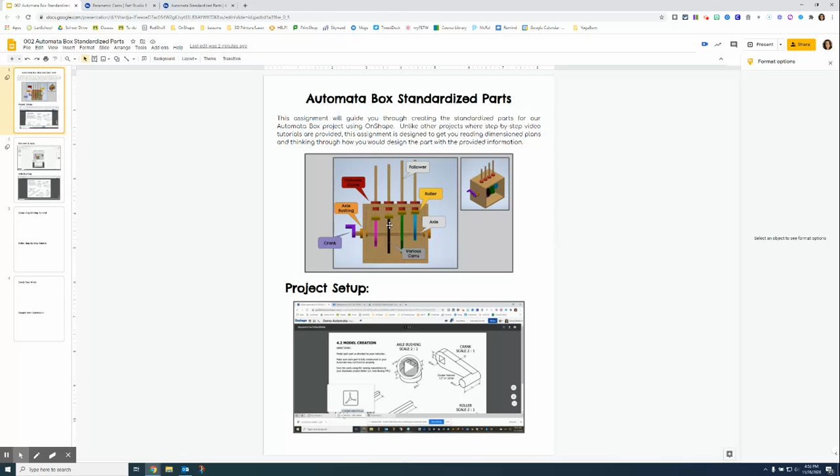What I mean is we are going to sketch this. It almost looks like a semicircle, but it's not, and I know that because I have this linear dimension here, 0.0625, and a radial arc measurement. We have a linear measurement here provided by the 0.625 typical marking. So what we're going to do is sketch this semicircle with the little straight nubbin, extrude it back, and then we have a square that we will extrude a certain depth.

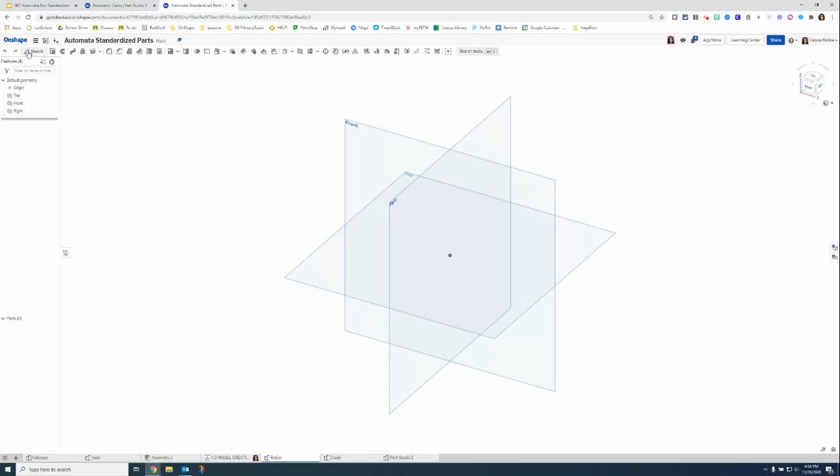In Onshape, go ahead and create a new part studio. Have your plans handy so you know where these numbers are coming from. We're going to call this one roller, and we're going to go ahead and start our sketch on the right side N for normal.

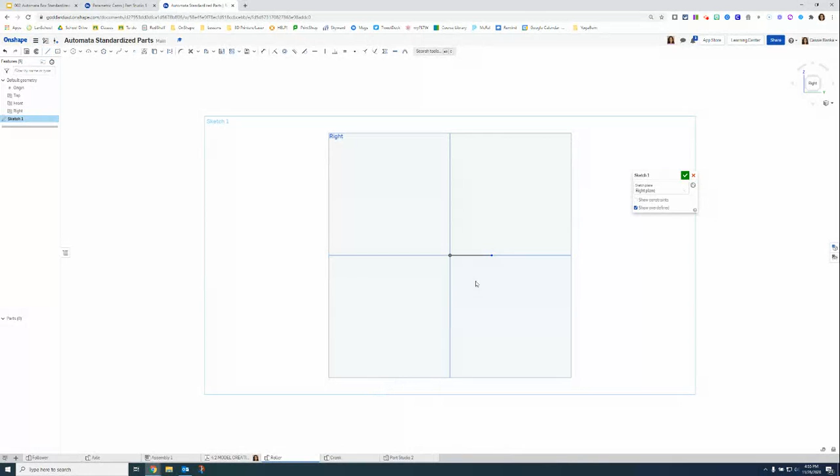This time I am going to start with a line, starting on the origin. That line is going to represent the top edge of our roller, which is 0.625 typical. That means this is a square roller at the top, so this length is 0.625, this is 0.625, and finally 0.625.

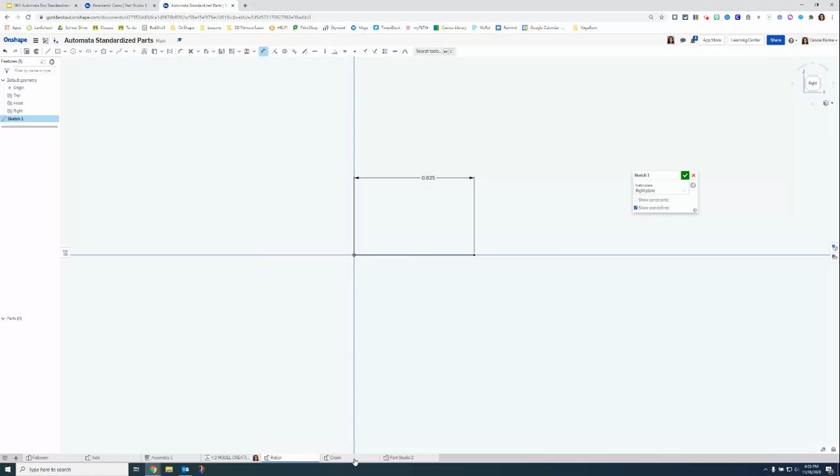So D for dimension, 0.625. Then I'm going to zoom in so you can see a little better, and I'm going to go ahead and draw on either side those tiny little notches that are 0.0625 on each side.

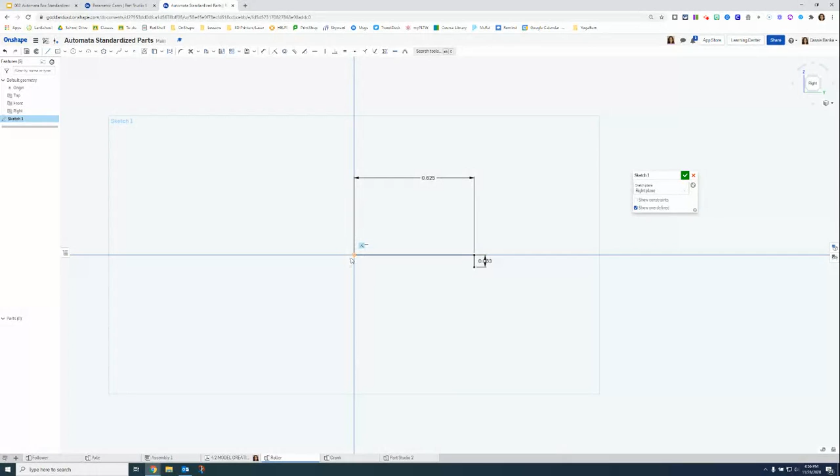So L for line, drop it down, 0.0625, and then escape out. L for line, and I'm going to see if I can grab, using that predictive geometry, kind of bring that over. Do you see how that's predicting? And get it to set. So now those two sides, even though I didn't dimension, that side is equivalent to that one. That's kind of cool that Onshape does that.

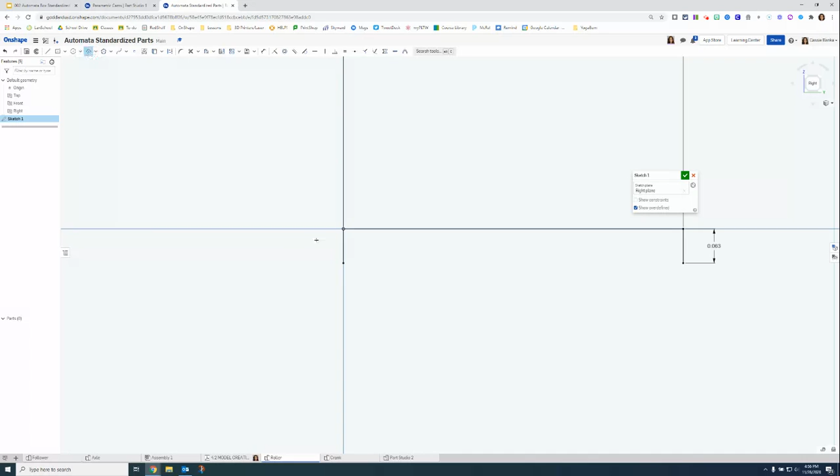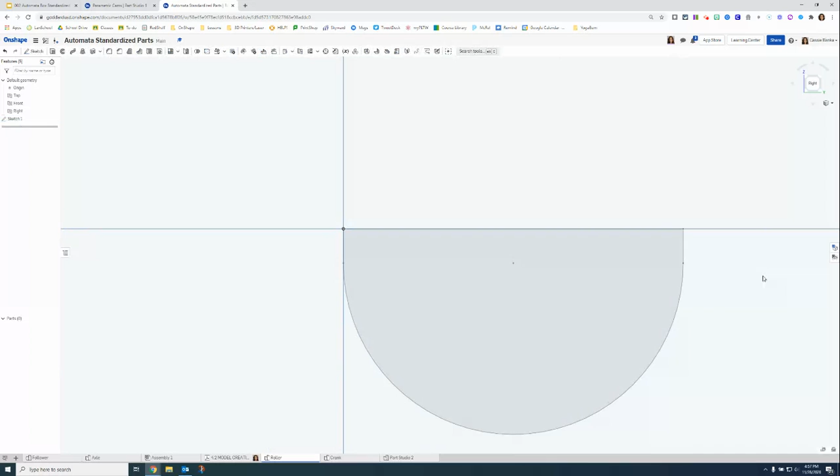Now what I want to do is I want to have a 3-point arc. I'm going to connect from that side to that side, and drop it down. Then I'm going to look back at my plans to figure out what that radial measurement was: 0.3125. So D for dimension, click that bottom arc, 0.3125, enter. So there is my overall sketch, and I'm going to extrude this backwards.

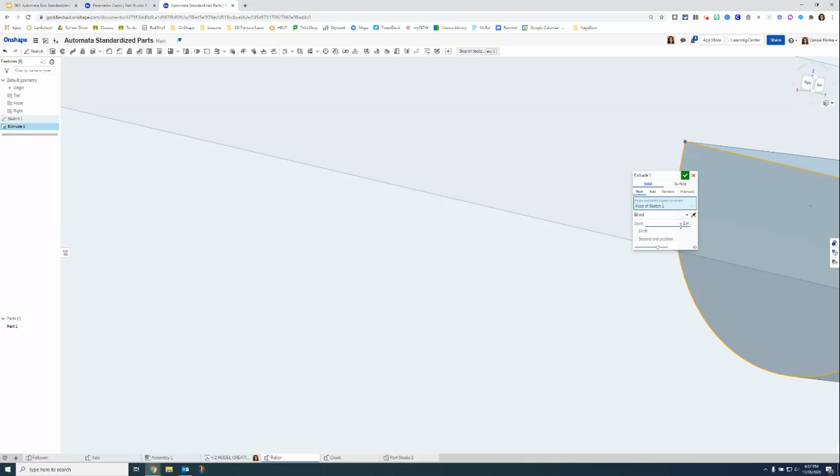Flip it the other direction, doesn't really matter, I guess. But the dimension for the extrude depth comes from this 0.625 typical measurement. So I'm going to make that 0.625, hit enter, and green check mark.

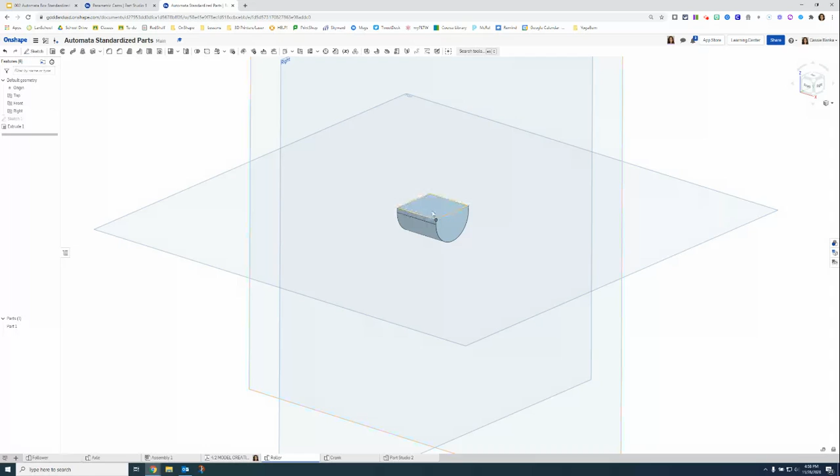Next part of this process is to go ahead and sketch that square hole on the top and extrude it to the depth on our plans. So I have my square here, and I am going to extrude it at a depth of 0.1875. I'm going to go back to my roller, right click on the top, start new sketch, then N for normal.

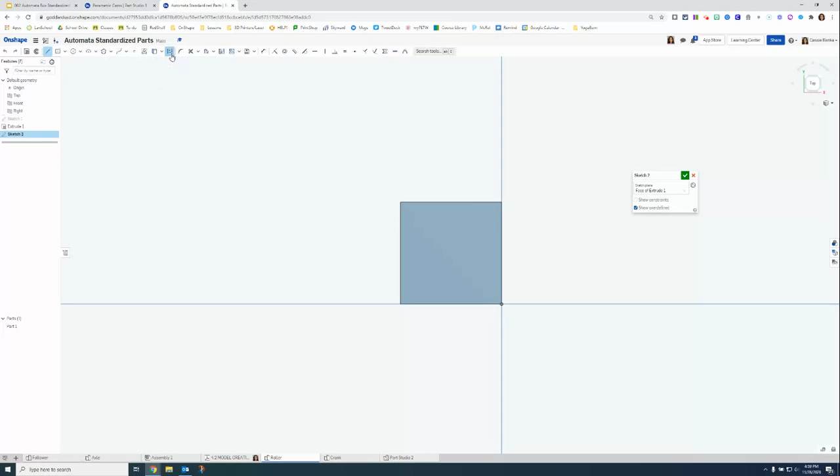And I'm going to start that center point rectangle. Ooh, but there's nothing for me to grab because I constrained the line to the origin instead of having a center point here. So let's see if we can find a center point, and the way I'm going to do that is by grabbing a line. Because this is not going to be part of the object, I am going to use a construction line. Right here, where it goes back from the dots, I'm going to create a couple of diagonals. Those diagonals should give me my center point where I can constrain my rectangle.

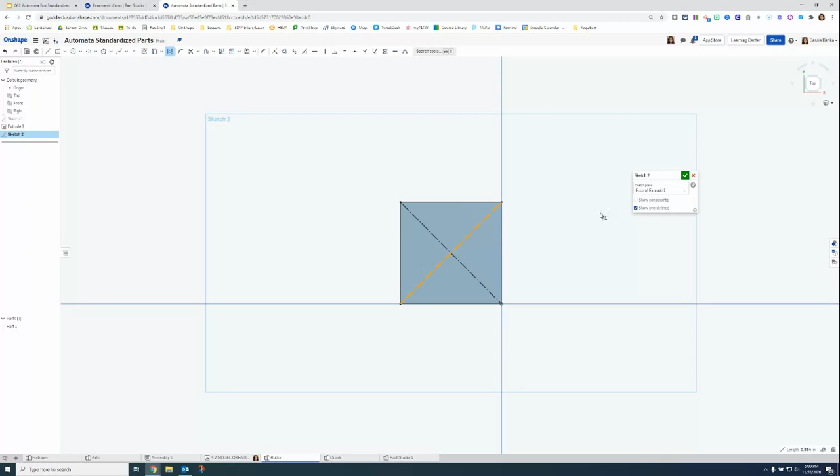See how this one didn't change to a construction line? It's actually an object line. I can click that and then click this little construction toggle, and it gives me what I need. So now I should be able to grab that intersecting point here, and it shows me this is the intersecting point because it gives me that tiny little yellow rectangle. So I'm going to go ahead and put a point there. I could theoretically go through and delete these lines now that I have my center point if I wanted to. So I have my center point.

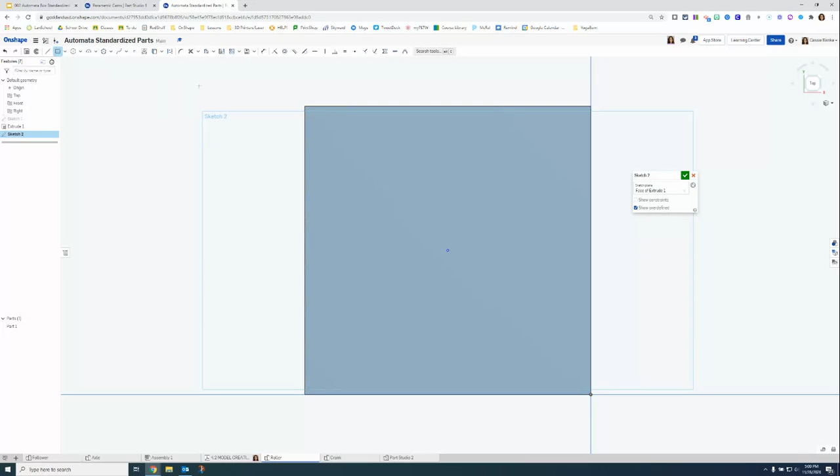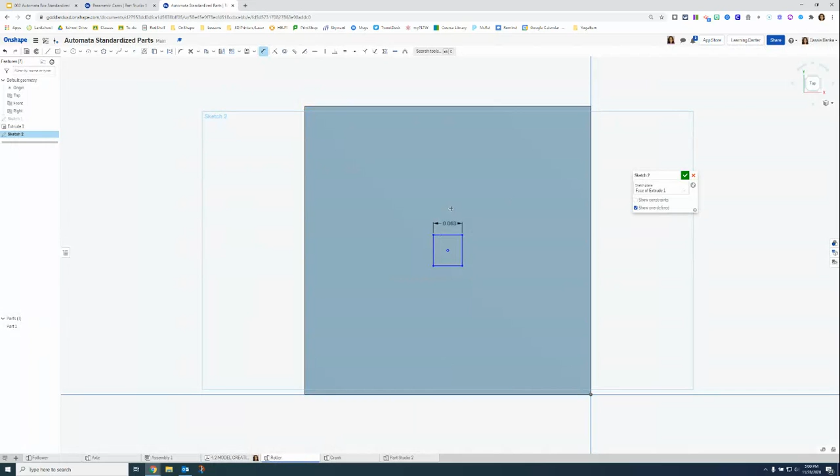I'm going to draw my rectangle, and this time the dimensions for the cutout will be 3/16 of an inch on each side at a depth of 0.1875. So 3/16 inch, D for dimension, 3/16. And then I'm going to use my equal constraint to set that side equal to that side.

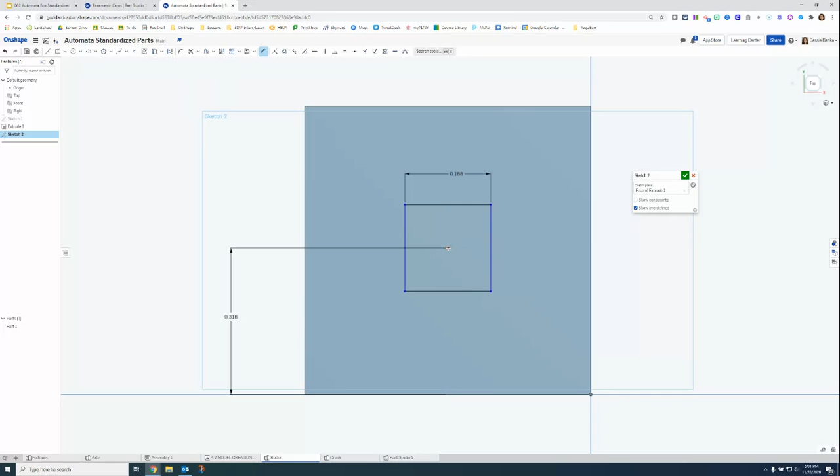And then I am going to go ahead and extrude. I wonder if it's not constrained, probably because I haven't defined the distances from that center point and from the center point out to the side, would be my guess. Oh, center point, yeah. So dimension. Let's try that. There we go. So I just had to locate the center, and once I did, then it was okay.

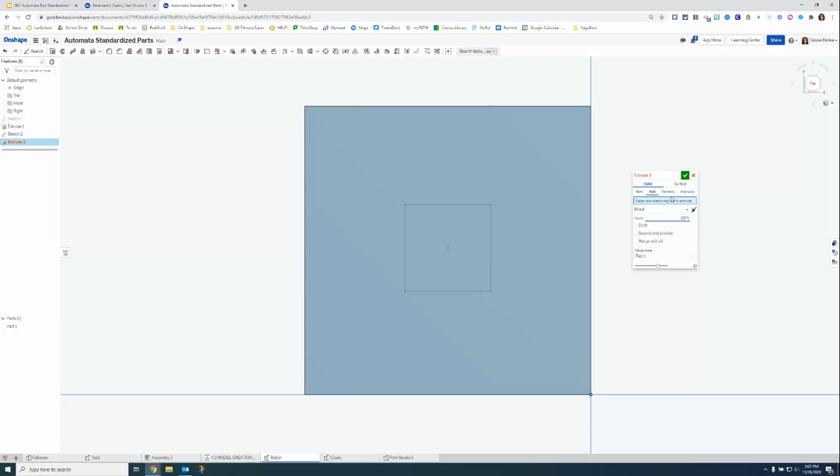Now I am going to extrude that little rectangle, and it is a depth of 0.1875, and it is a remove. So I'm going to click that rectangle again, make sure that it shows, click the green check mark, and we should be golden right there with our roller.

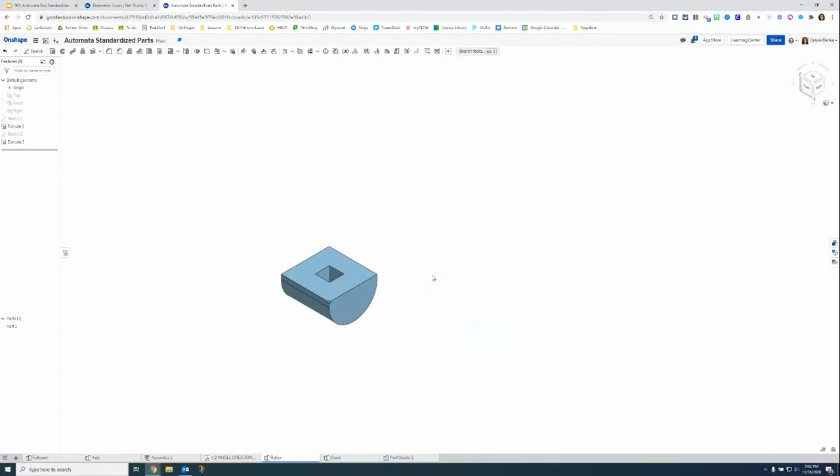So if I put this in isometric view and hide all those planes so I don't get so confused, then I have a pretty good looking part. Hindsight, I probably could have sketched this a little different or used the origin to my advantage so that this would be constrained on the origin, but we did create the part and it's not too shabby looking.